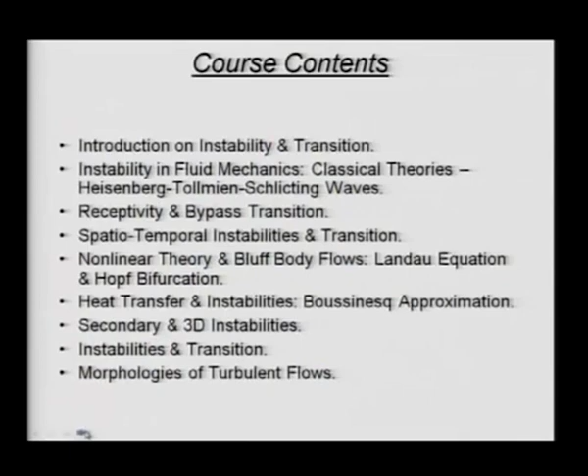So let us get back there and continue the historical introduction that we have been talking about, that following the experimental observation of Reynolds.

This was in turn triggered by the observation by Stokes that he could not get the pipe flow calculations to match with the experiments, and was followed by Reynolds in his pipe flow experiments.

He showed that small ambient disturbances actually magnify, and that leads the settled laminar flow to go from

laminar state to turbulent state, and the whole idea of that experiment will be revealed to us later.

But let us now basically talk about the other aspects, that the whole stability study was started with the mistaken belief that viscous action, if it is there, only damps the disturbances, and this was essentially the idea of

Kelvin and Rayleigh. This was settled after a lot of jousting, you can say, between various

groups, among various groups from Germany and Europe in the continent, as European continent in UK, and finally settled by

experimental observations at NBS Washington by Dryden's group.

And we concluded that it kind of established the existence of wavy disturbance flow at the onset, which we called as

Heisenberg-Tollmien-Schlichting waves, or HTS waves, which was obtained by linearized stability theory for a parallel flow. That is the catch.

However, when the same theory was applied to pipe flow, channel flow, and Couette flows, it was seen that these are unconditionally stable for all parameter values.

So basically then people started looking at alternate explanations, and they suspected that this could be due to the nonlinearity

of the instability regime, or it could be that we had used an assumption that the streamlines are parallel.

That could be at fault. So basically we have to include the growth of the boundary layer into account - that is what we mean by non-parallelism. And of course, we may have some other unknown mechanisms, and in this context we come to

So what was observed by him, that the flow itself has a property called receptivity, that it is receptive to certain class of disturbances. It is not receptive to all kinds of disturbances.

So receptivity is something that was proposed, as opposed to the general theory of stability, which is posed

as an eigenvalue problem. And as you know, in all eigenvalue problems you do not need to define what the disturbance is. You have a homogeneous differential equation, and also a homogeneous boundary condition.

So you have no way of putting in this information that there is some definitive input.

So basically this is the beginning of a dynamical approach to the study of stability through receptivity analysis. So in the receptivity analysis, what you do is you look at the dynamical system

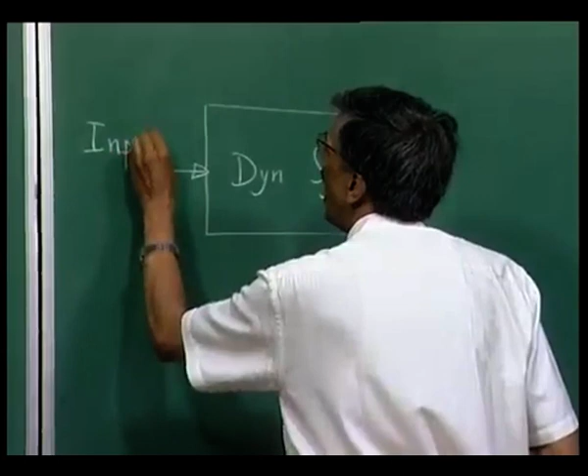acted upon by some input, and that leads to observable outputs. And so receptivity is the property of this dynamical system.

Receptivity is the property of the dynamical system, and this property is what we call the transfer function.

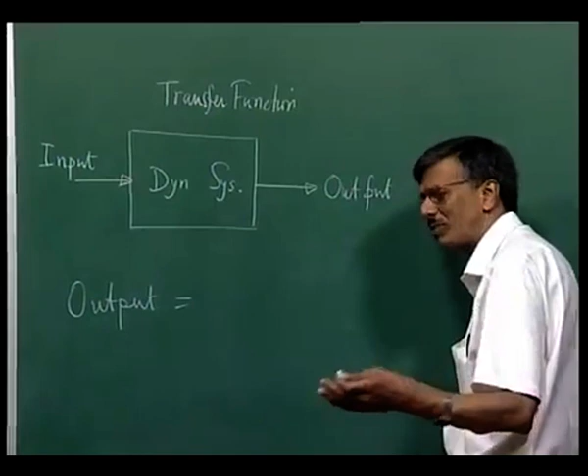So in a sense, what we are talking about is that the output is nothing but a kind of a product, which I will call using the scientific term convolution of the transfer function times the input.

This is important, because as long as we cannot include what is causing the perceptible disturbances, the picture remains incomplete, and this is what Morkovin was suggesting, that we should talk about it.

So if this transfer function is not receptive to that class of disturbances, then even in the presence of that input, it is not going to

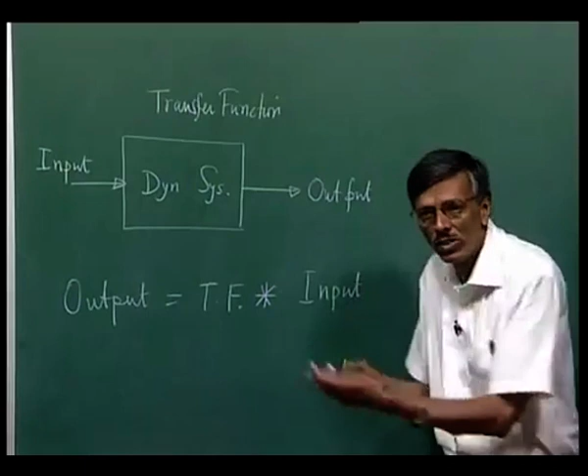do anything. This is rather important, because when Schubauer and Skramstad in their experiment in the tunnel tried to excite those waves by acoustics, they were not successful.

Then they used a kind of vibrating ribbon. So what they did was the following: if you have a flow past a flat plate,

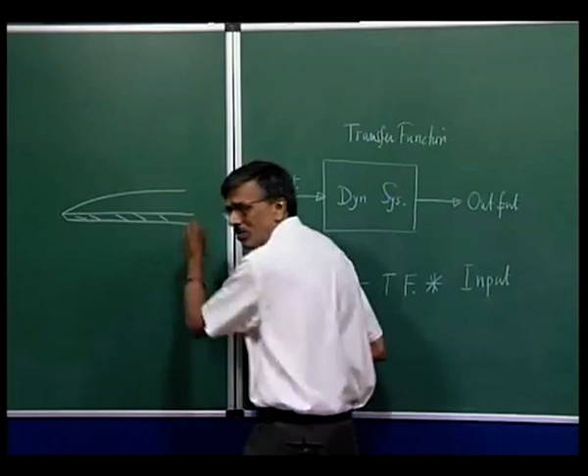then the boundary layer grows like this, and what they did was put in a kind of vibrating ribbon close to the boundary, and then started vibrating it. So this is what you may call the vibrating ribbon.

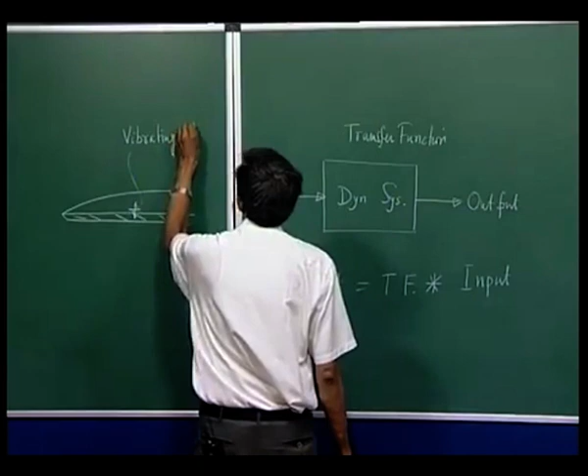This was made of bronze, and it vibrated at a specific frequency, which was actually used in Tollmien and Schlichting's calculation. We talked about in the last class that G.I. Taylor also wanted to do some experiments. What he did was this: you have a plate, and then you put in a kind of vibrating bump.

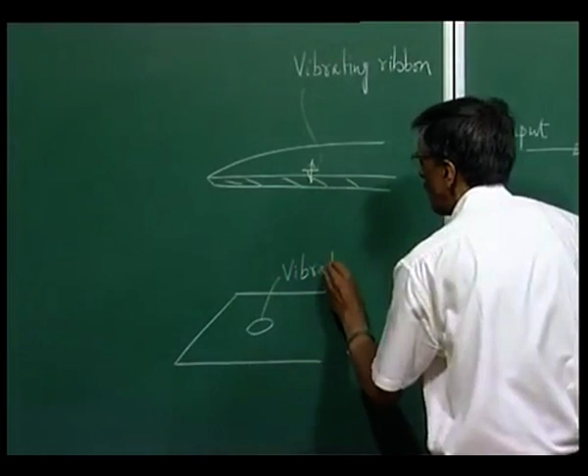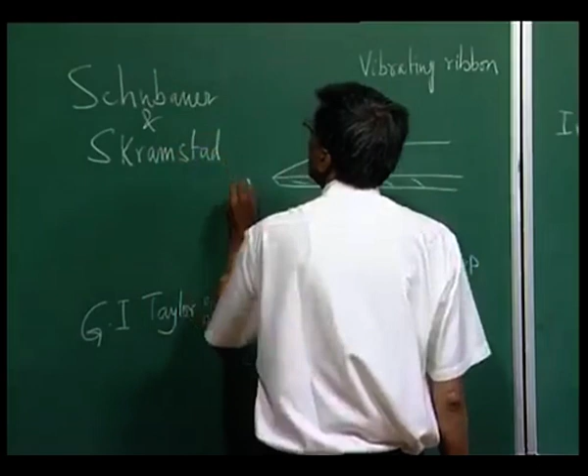This is like a circular patch, flexible, which goes up and down, and this was the experiment conducted by G.I. Taylor in the 30s, early to mid 30s. This other experiment was done by Schubauer and Skramstad. It was published in 1947, but it was done long before. It remained classified during the war years and got published afterwards.

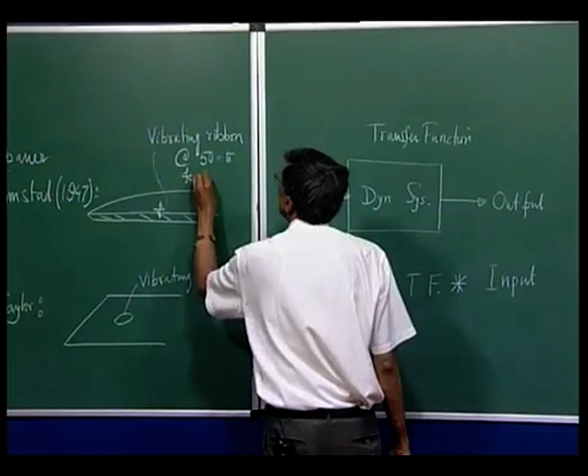So this vibrating ribbon was excited at frequencies of, let us say, 50 to a few hundred hertz. Whereas in this case, this was vibrated at 2 to 5 hertz. So this could not produce a Tollmien-Schlichting wave, but this could.

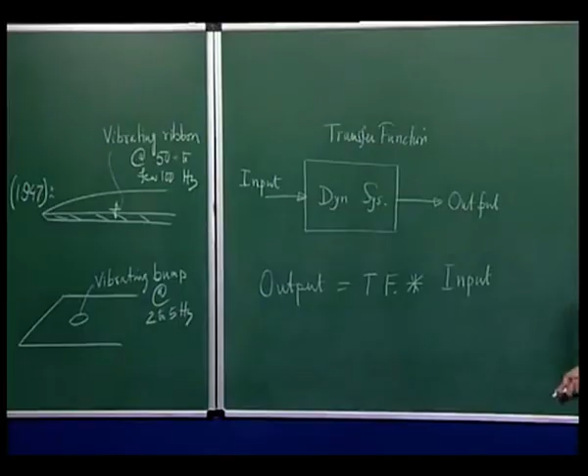The reason is the eigenvalue calculations of Schlichting did show that the flow is not receptive at low frequencies of this kind, but they are indeed receptive to this other frequency. This was something that one needs to do. In experiments, you just do not simply do a qualitative experiment and then make a value judgment.

So we understand. Although I must tell you that G.I. Taylor was an outstanding fluid dynamicist of his time. It is said that he never took any sponsored project. He used to do science for its own sake, using his own money and resources, and he was a professor at Cambridge. He did it for the love of the subject, but even a person of that caliber can sometime take a wrong step, and here is an example.

So this was something that was very good, that Morkovin suggested that we should look at the receptivity approach. We need to understand the transfer function very clearly. Stability theory only looks at the transfer function, whereas receptivity studies look at the full thing, because that also includes the information of the input.

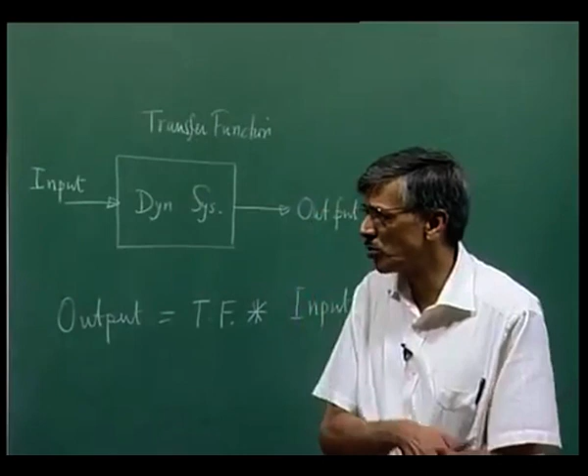We mentioned that there were some flows, like Couette flows, pipe flows, which do not show linear instability. So what happened is some researchers commented that those flows actually undergo transition because they suffer transient energy growth via some modes, which they call non-normal. We will go through these details.

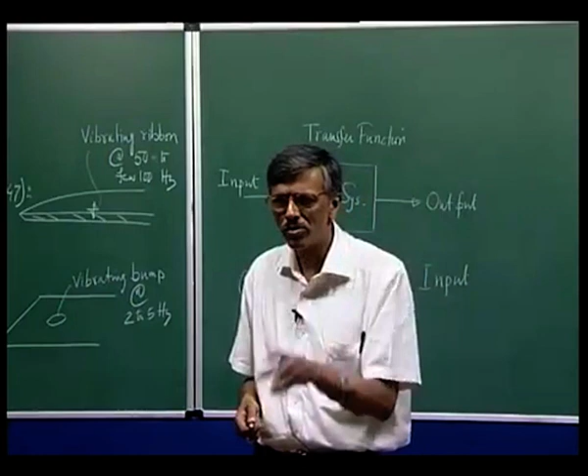The eigenvalue analysis looks at one frequency or one wave number at a time. So those individual frequencies or wave numbers are called normal modes. Here these people are talking about some kind of energy growth, not growing like a wave, but growing in time, and that is transient. It just grows and then it is not there. It directly takes the flow from laminar to turbulent state, not like the gradual growth you associate with the Heisenberg-Tollmien-Schlichting wave transition route.

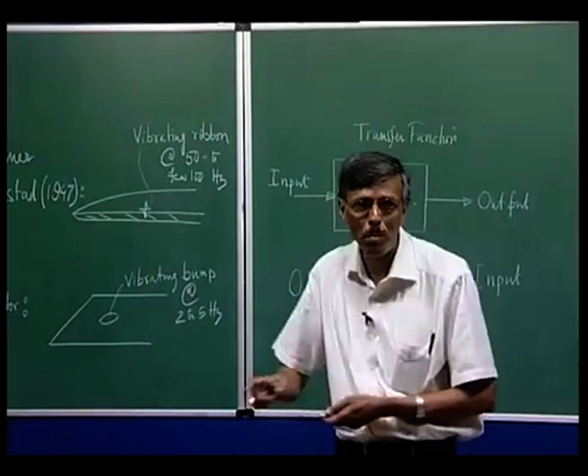Maybe this is an attempt to explain one particular type of bypass transition. We define bypass transition as that transition which bypasses the wave and its growth. This is the view proposed by Trefethen and his colleagues in this paper. There were other attempts by Landahl, where he and his colleagues talked about algebraic growth of disturbances and interaction of different types of instability modes.

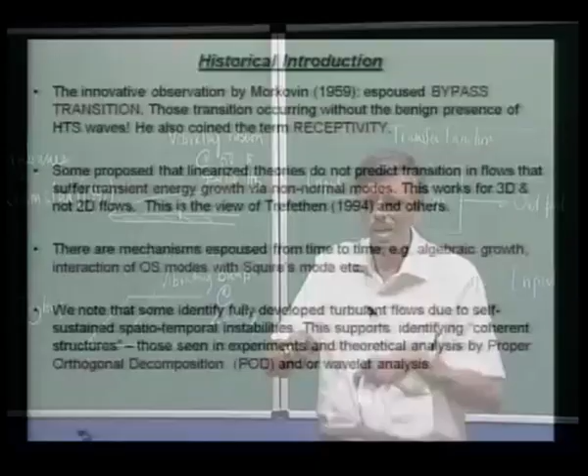Now, we also note that some researchers identify that you get fully developed turbulent flow due to some kind of self-sustained instabilities. This means you do not have to do anything, it will just become unstable, it will grow, become turbulent, then it may decay, but then again another set of disturbances will pick up. So that process is self-sustained, and during this process you create some kind of distinct structure, which has been called coherent structure. Think of eddies, vortices, forming, and those are what are called the coherent structures. They have been seen actually in various experiments.

Some theoretical analysis done by proper orthogonal decomposition or wavelet analysis also shows presence of coherent structures. So this is precisely the status now. We are in a time where we see possibilities of transition taking place through the growth of waves, or bypass transition, which is basically a basket with many routes. We talked about a couple of them: transient energy growth and algebraic growth of disturbances. There could be multiple instability modes interacting, and those also need not necessarily show you waves.

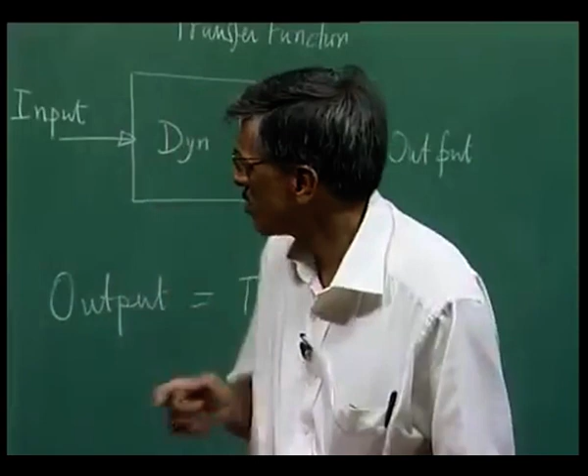But let me add that this experiment we talked about was a very specially designed experiment, and this ribbon was excited at a fixed frequency. So what we are doing is creating a monochromatic wave, and we see some kind of waves that grow downstream.

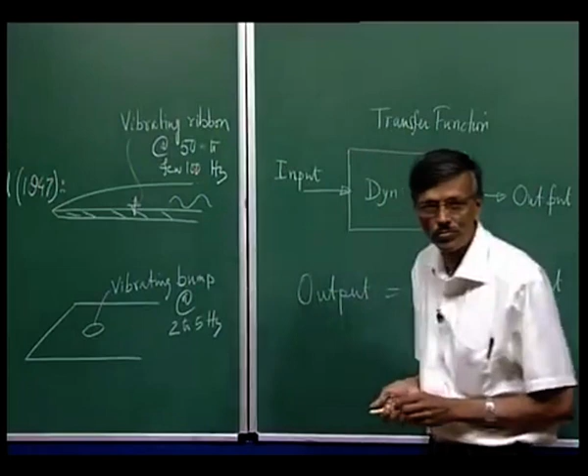Now, what happens in the immediate vicinity of the exciter was not talked about a great deal before the 1990s. People used to think that is not important. Even some books or monographs erroneously show as if there is nothing up to a point, and all of a sudden finite waves start growing. That is a wrong picture. In fluid flow, especially at low speed, you cannot have such discontinuities. It has to be a smoothly growing solution.

In fact, when we first did these receptivity calculations, we identified two distinct components of the solution. One we call the near field, in the immediate neighborhood of the exciter where we are exciting the flow, and the far field. In the far field, you see those TS waves we talked about, but in the near field you may see a totally different structure. We will talk about it in greater detail. So this is the picture we see.

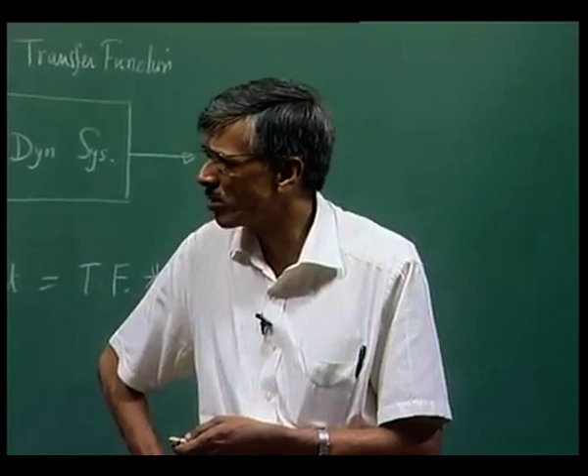Now let us go through the formal description of the subject through this introduction. What we see as instability in fluid dynamical flows is always there, right. That is what we say, that they are ubiquitous, and even today they remain a challenge, because we still do not completely understand transition and turbulence. We understand bits and pieces, and we are going to do that too.

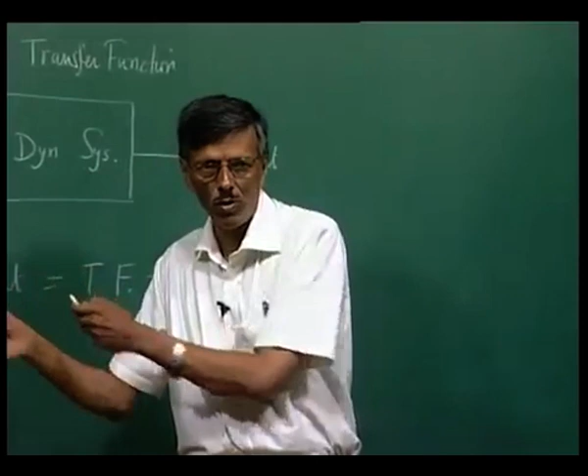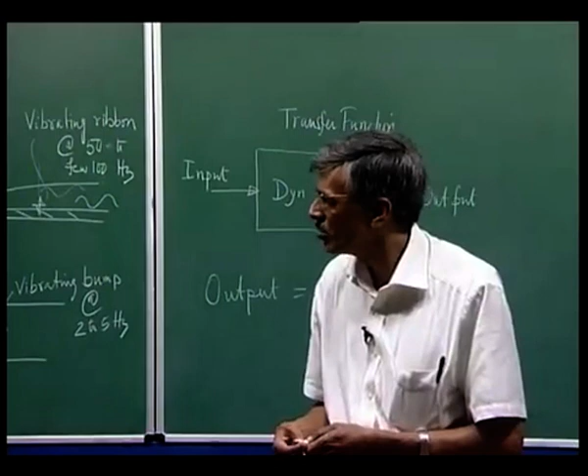Most of the time, people who spend all their effort studying turbulence, at the back of their mind, basically think about some kind of universality of turbulence. What it means is, irrespective of whatever input you have, the eventual output you get is only one turbulence, one kind of turbulence. Although they describe it not in a deterministic manner but in a stochastic fashion, they say that even in a stochastic picture you have a universality, which is debatable, and which some of us do not agree with.

So that is why what we do is go from the laminar flow side: first it becomes unstable in a primary mode, then you could have a secondary instability, then tertiary instability, you could have nonlinear stages, and then you have fully blown turbulence. So that is what we are talking about.

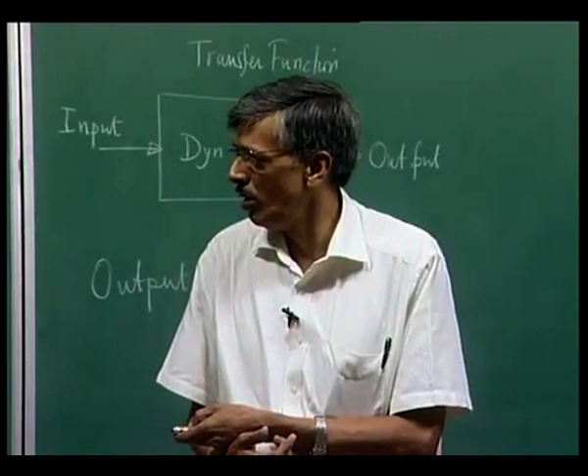So for pure fluid dynamical flow, we are saying it is there everywhere, but if you add some additional physical effects, for example heat transfer or chemical reaction, as you may see in an engine, those also suffer instabilities, and those instabilities are going to be even more complicated. So we will probably spend some time talking about heat transfer. Chemical reaction we are not going to discuss at all.

So, if you are going to work as a theoretician, it is necessary that you communicate to your friends who will do those experiments, and you should tell them how to design the experiments. This is rather important.

So, let us talk about one of the applications that should motivate most of you, where this understanding of the flow transition is very, very crucial.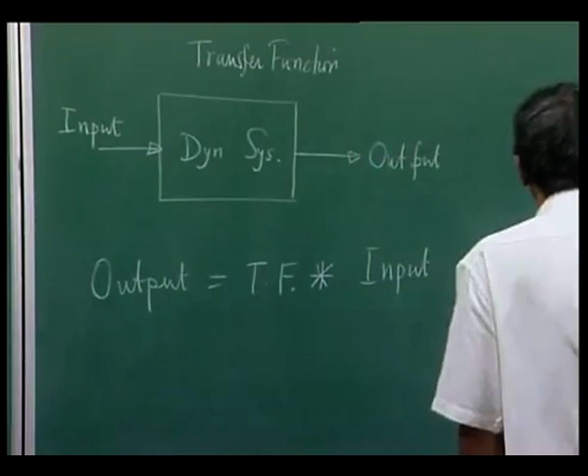For example, we are talking about modern day aircraft, where we basically want to keep the flow laminar as long as possible. Why? Because if I plot the drag, or one component of it, the skin friction, versus Reynolds number, then we know even for flow past a flat plate, the laminar flow, if I do it in a log-log scale, it goes like this. So this is the Cf versus the Reynolds number for laminar flow.

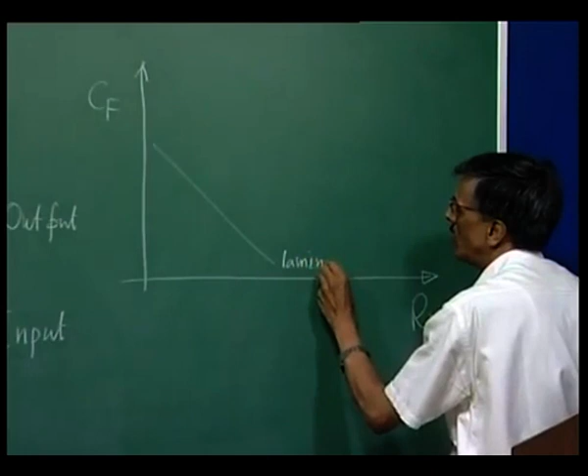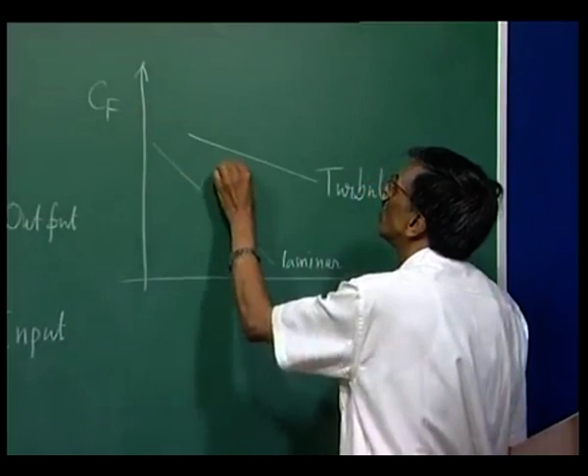Depending on the kind of disturbance that you have, it actually goes on to a turbulent branch. So the way the transition process takes place depends on the background disturbances, and it connects like this, depending on different levels of disturbances.

So that is why the receptivity factor comes in. Where would you continue up to this laminar flow? It depends on how you control the disturbance environment. If you can control it well, then instead of flow becoming turbulent here, you can delay it and it can happen later. And you can see that we are talking about a log scale.

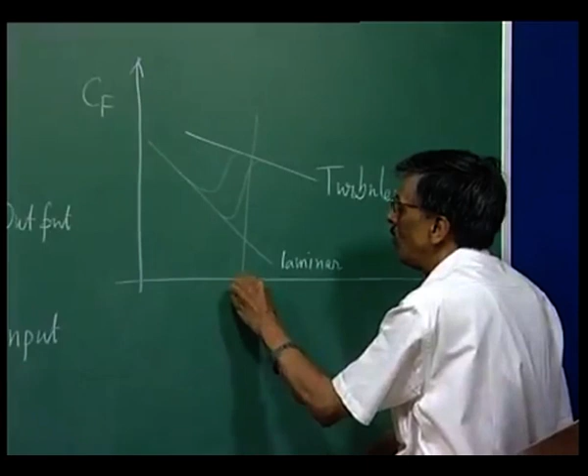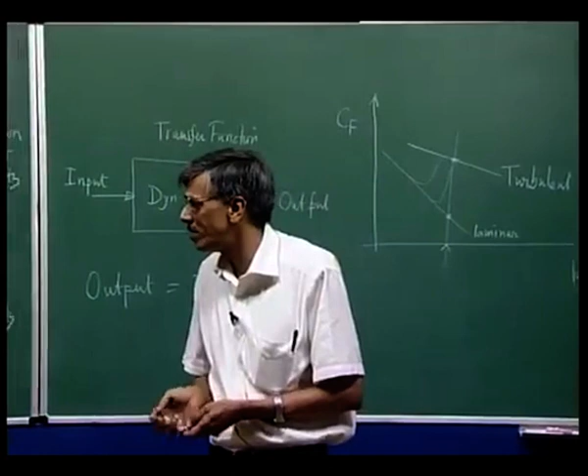So if I look at a position, then I can see for laminar flow the skin friction is here, and for the corresponding turbulent flow, if it is fully developed, it is there. This difference is quite significant. We will give you an example - you find that this is significantly higher. So one of the goals for any good aircraft designer would be to keep the flow laminar as far as possible.

And there is a technology which is called natural laminar flow technology, which tries to design and alter the wing geometry such that you can control the transition process. So those wings are called NLF wings, or natural laminar flow wings.

And you understand also that in designing those wings, we are not depending upon active devices. Why not? Because for an active device, if it does not work, then we will be in deep trouble operationally. Think of it - you have designed an aircraft thinking the flow will be laminar, so you have put in some engine, and then up there in the sky while it is flying, your active device fails and flow becomes turbulent, and the engine does not have sufficient power - then your flight is in jeopardy.

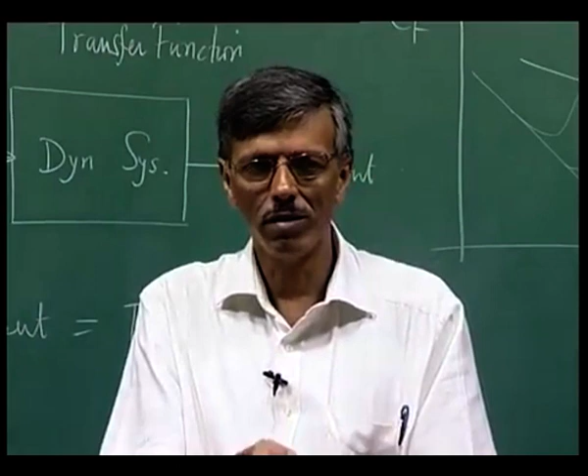So in aerospace engineering, we are always very conservative. We always try to go for passive devices instead of active devices. Although that does not preclude that we do not basically look at active devices - a lot of research goes on using various active devices.

And here I have shown you a picture of an Airbus 340. So this is the isometric view of that aircraft that you can see. The green part in this diagram indicates where you could try to keep the flow laminar. So you are not trying to keep the flow laminar over the full wing - it is only part of it you try to keep.

And if you can do that, one is talking about a 12% gain, 12% reduction in drag, and that is quite significant. And as I told you, apart from the fuselage, most of the aircraft actually experiences drag that is due to skin friction, the viscous action. It is not as much due to the pressure component. We have two components of drag: skin friction drag and pressure drag.

So it is the fuselage actually that gives a significant amount of pressure drag. I will give you an estimate, so you will see that estimate. So you can actually think of reducing the wing drag by 10 to 12%, and that is quite significant.

Empennages are those control surfaces, the horizontal stabilizer and the vertical stabilizer, they are also wing like bodies. So you could basically keep the flow laminar over those also. Whatever works in the wing would also work in the horizontal and vertical stabilizer. In addition, you could also keep part of the flow over this nacelle which houses the engine laminar, and there you can think of getting a 1% reduction in drag.

So it is quite possible to do that, but you notice that this aircraft's wing is swept back, making some angle with the fuselage direction. Swept back wings are not too amenable for keeping the flow laminar. That becomes better if you have the sweep back angle smaller. That is why many aircraft designers would not like to have the sweep back too large. A rule of thumb is try to keep your sweep back angle less than or equal to 20 degrees. Why do we need sweep back?

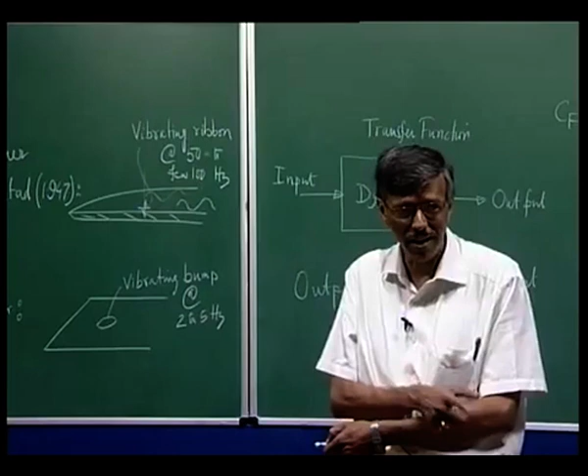Most of these aircraft fly at what speed? It is about Mach 0.8 and thereabout. So if the aircraft is moving at about a Mach number of 0.8, then in some part of the wing you could get a shock. So the good news is if you can keep the flow laminar and design the contour in such a way, that also helps in controlling the shock. So those are called supercritical wings. Supercritical wings are designed for keeping the shock weak.

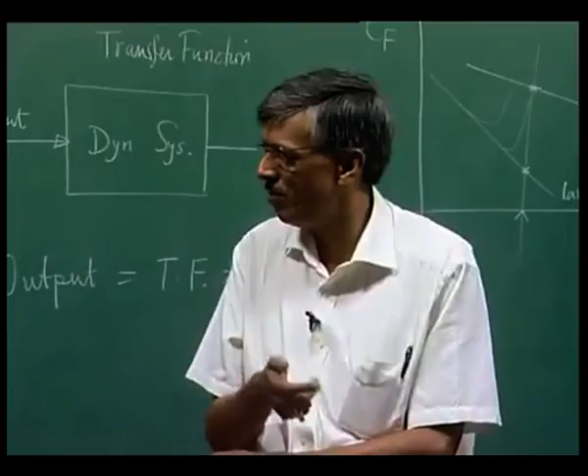It so happens that what works for supercriticality also works for natural laminar flow. So all the modern day aircraft that you see, like A340 or Boeing 757, 767 and higher models, they all have NLF wings which are also supercritical wings. So you try to push the frontier, go as high as possible in terms of Mach number, and to avoid shock forming you have to provide the sweep back. What matters most is the Mach number normal to the leading edge, not parallel to the fuselage. That is why you sweep it back, so that the Mach number normal to the wing becomes lower. That is the whole idea.

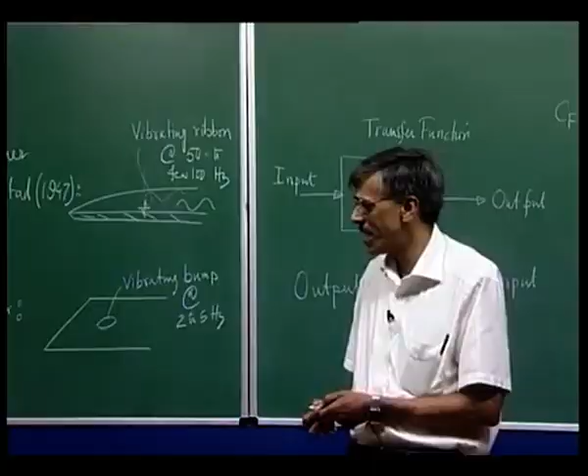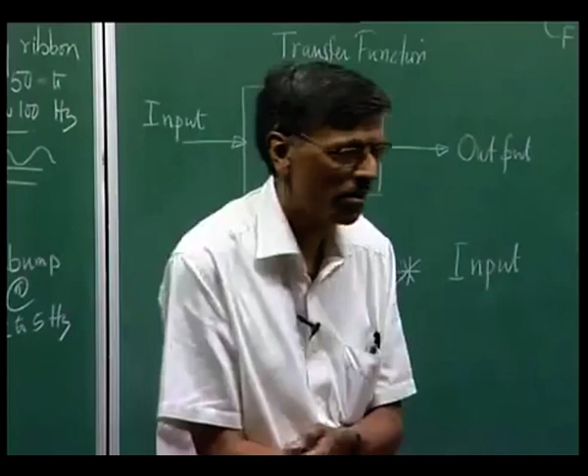Now if you are trying to design a new aircraft, these are the problem areas. Even today we do not predict transition very well. We simply do not, and even if we do, they are not very reliable. And if you are talking about the problem of prediction, experiment is virtually impossible, simply because every wind tunnel brings its own signature. You take the same aircraft model and do experiments in two different tunnels, you will find a very disappointing result, because they will all be different. So this is what we try to keep in mind as we go along.

So we are going to look at how things work, and this is an example of a beautiful design. I am not very sure if it is still out yet, it was supposed to have been inaugurated this year. This is an aircraft designed by Honda, and unlike any other aircraft, the surface finish of this aircraft is superb. This has happened because the automobile sector has better manufacturing ability than what we do in making airframes. If you come close to an aircraft you see those rivets, the gaps, they look very ugly, and they also actually create a big potential for transition.

Whereas these people have designed the wing as an NLF wing. Honda, I will show you some clip today itself. And not only that, they have also positioned this nacelle with respect to the fuselage in such a way, it is a beautiful design, because if you calculate the drag of the nacelle, calculate the drag of the fuselage, add the two up together, and then go to the tunnel and do the experiment with the fuselage and nacelle together, that total drag is lesser than the sum. So this is what is called synergy in design. This is one of the most beautiful aircraft that has been designed.

Compared to that, you can look at the fuselage that contributes to 0.0092. So you can see it is the fuselage which actually contributes more drag than even the wing. Then the stabilizer gives a drag of the order of 0.0027, roughly about half of what you get from the wing, so it is not negligible. And the nacelle and other miscellaneous contributions, that is about 0.001. This all adds up to about 0.0189 or so.

This column tells you the percentage component. So wing drag is roughly about 32%, the fuselage is about 48 to 50%, the empennage contributes about 14-15% of drag, and the nacelle and other quantities define about 5 to 8% of the drag we talked about.

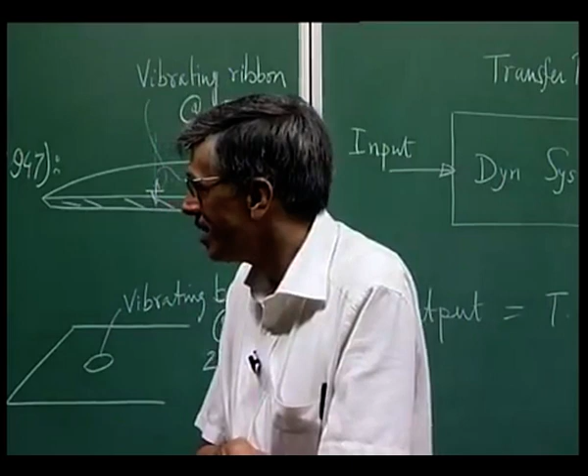Now, if I show you that picture for the Airbus A340, suppose we manage to keep the flow fully laminar on all lifting surfaces, not part, lifting surfaces - that is just the wing and the empennages, nothing else. If we can keep that, then the drag of the wing would come down from 0.006 to 0.002, that is 1/3 the value, as shown here.

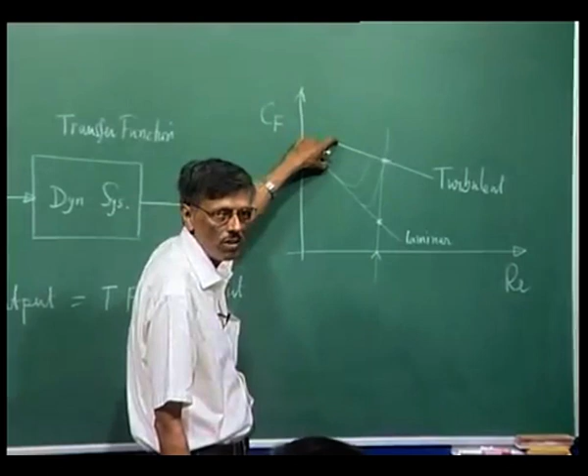Actually this jump for a flat plate is about 5 to 10 times. So you try to keep the flow laminar as far as possible, and further you keep it, you see the dramatic growth. Suppose it becomes turbulent here, then this differential is not very much, but if you can keep it like this, you can actually get a very significant reduction in drag. So that is what you see, the drag becomes 1/3 for the wing.

Now the fuselage of course remains the same at 0.0092, and the empennages also become almost 1/3, with other things kept as is. So the drag has reduced from 0.0189 to 0.0131. And now you see what has happened: the wing contributes about 15% of the drag, but the fuselage contribution has gone up to 70%, and the empennages have also come down, and the nacelle has also come down.

So talk about the flow over a nacelle. Now there also people have done something. What really matters is the pressure gradient in the flow. So if I simply take a cylindrical nacelle, its pressure distribution is given like this - you have a suction peak here. Following the suction peak, you have a severe deceleration of the flow. Adverse pressure gradient is very large in this part.

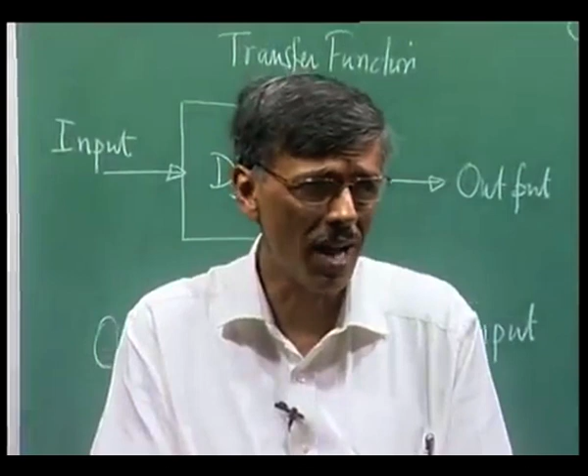That actually triggers transition immediately. So one rule of thumb is avoid adverse pressure gradient as much as possible. If you are aware of the NACA 5-digit series and 6-digit series aerofoils, those were designed knowing this - that you have to keep the flow under favorable pressure gradient as long as possible. One theme in the development of those aerofoil sections in the 1920s and 30s was to keep the maximum thickness point as far aft as possible - they pushed the maximum thickness point to say 35% to 50% and so on. That is the story of 6-digit series aerofoils.

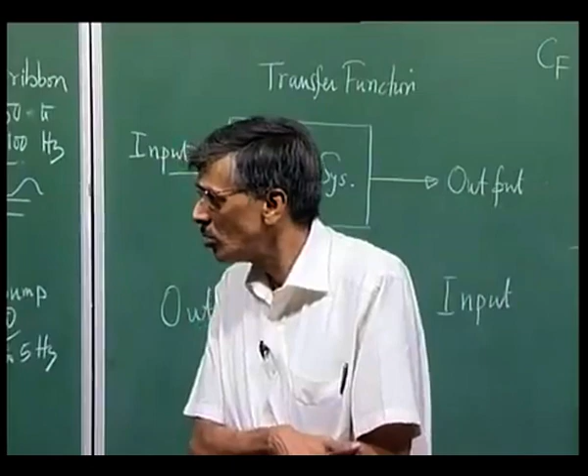So here also you can do the same thing. Now you can see the contouring - instead of having a flat diameter, now it has been increased. And if you are looking at flow less than Mach number 1, such a contour would create a flow acceleration up to the maximum thickness point, giving you a very smooth CP distribution as compared to this peaky CP distribution.

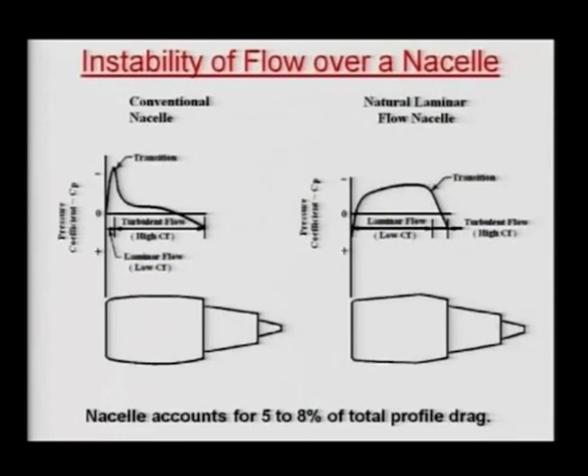So this is one of the ways people have been talking about reduction of drag over the nacelle, and we have already said it accounts for about 5 to 8%. Whatever you get, it is good enough. Somebody said sometime ago that if you can reduce drag by 1%, the operational cost comes down by a few billion dollars. We just saw that for an aircraft like Airbus, people are talking about some amount of drag reduction by promoting laminar flow, but we also saw the Honda Jet, which looks gleaming and has a very fantastic drag polar, which is very good.

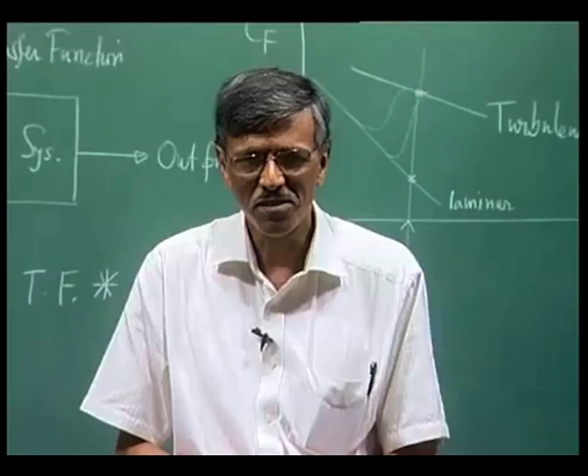I told you about surface finish. Now, surface finish is not something you only see with your naked eyes. Sometimes you worry about roughness, which you can only measure using profilometers. The effect of even small scale roughness can be very profound, and people have known about it. This effect of roughness is a function of Reynolds number.

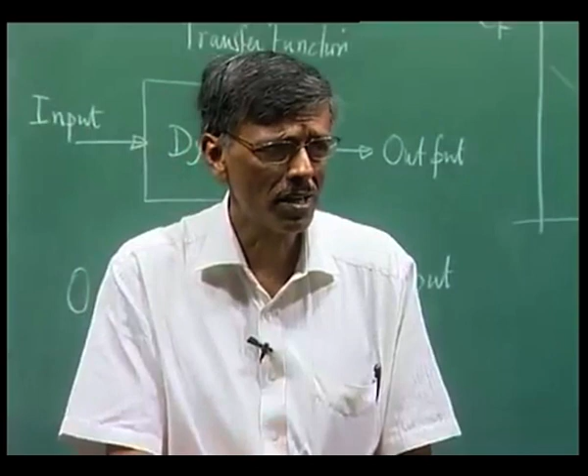You see all those NACA 6-digit series aerofoils which are designed, they somehow work for gliders, but they do not work for powered aircraft. Why? Because unpowered aircraft go at a smaller speed, so Reynolds numbers are lower, of the order of a few hundred thousand, whereas if you look at that business jet we saw, the Honda Jet, the cruise Reynolds number is something like 10.3 million. The aircraft in our flight lab would also have a cruise Reynolds number of the order of a few million, if not 10.

So, at those high Reynolds numbers, the small roughnesses act like an amplifier. They really promote turbulence. The effect of roughness on airfoil sections is quite well known. That is why 6-digit series aerofoils are not used in any commercial aircraft that you would see. They have major effects on lift, drag, and bypass transition near the leading edge.

Now, let me tell you somewhat about the property of these natural laminar flow aerofoils. They have the following property: if I plot the section property, on this side I will plot the non-dimensional lift coefficient, and on this side the non-dimensional drag coefficient. These NLF aerofoils, or the 6-digit series aerofoils designed in the 20s and 30s, have this following type of property.

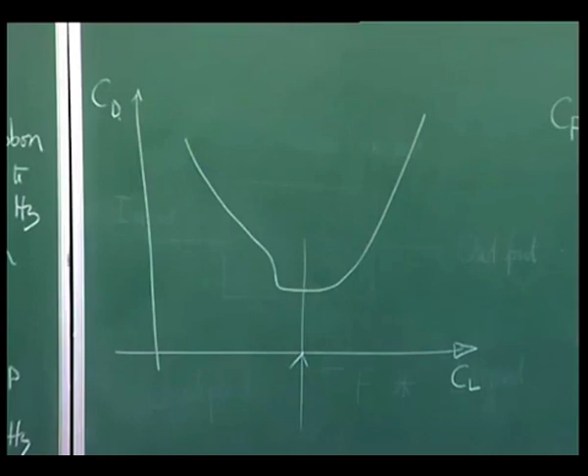So what happens is you design it for, say, this point here. So this is your design point. At the design point your drag is quite nice. This could be your cruise configuration, but suppose when you are landing or taking off, or if there is some other off-design condition, you can see that if you are here, then this drag and this drag are quite different, and roughness actually changes this curve altogether.

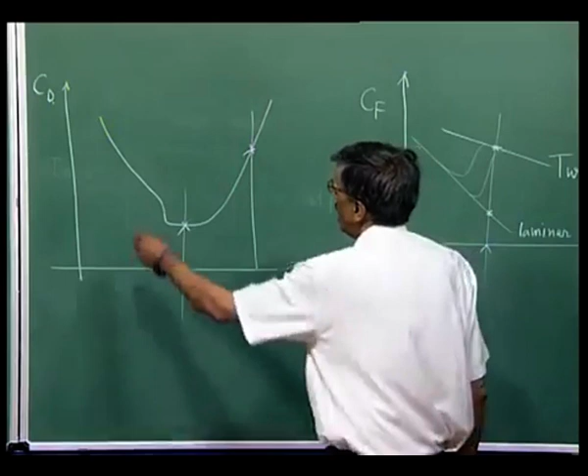If you have roughness, you could see that this could actually go like this. So this is what is called a drag bucket. Most of those 6-digit series aerofoils have a drag bucket; the drag polar looks like a bucket. If you are working in this region, it is all very fine. Outside that region, drag increases very badly.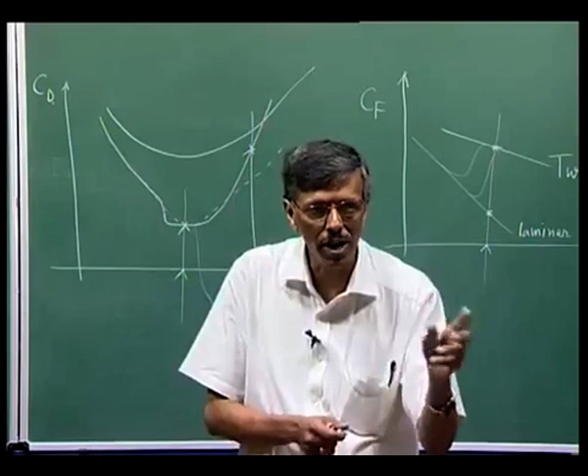That is why it was done. Whereas the modern day NLF aerofoils would be something like this. So it is not a single point design, it is a multi-point design. You try to design it not only for the cruise configuration, but also for, let us say, landing and takeoff and so on. However, we have seen that this rapid increase in drag is contributed by roughness for those 6-digit series aerofoils.

And what it does actually, this roughness element, where it sits, is almost like a bump, and it creates some kind of streamwise vortices, like helical structures in the streamwise direction. These streamwise vortices actually create an instability called cross flow instability, and it is basically inviscid in nature. So you have no way of controlling it. Inviscid mechanisms: these vortices create some kind of inviscid instability, and they are going to trigger transition immediately.

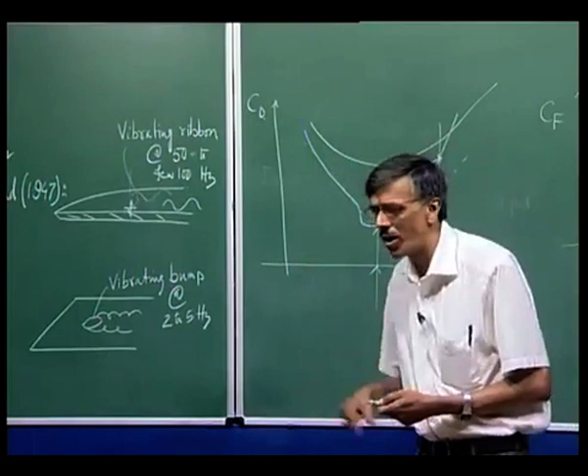So that is why you try to avoid having roughness. This was investigated by a group, Radeztsky and his co-authors, who actually tested a 45-degree swept wing with this particular natural laminar flow section. This is what is called the general aviation wing, GAW wing, with the number code 0415. This is a 15% thick aerofoil, and they compared the location where transition occurred for the following 4 cases: you take a painted surface...

One would probably think painting makes a surface smoother, but despite that, the peak to peak roughness height is of the order of 9 micron. That's not too large, but even from a transition point of view it could be disastrous. You could machine polish the surface, bringing down the peak to peak roughness from 9 micron to 0.5 micron RMS. But what works best is the individual ability to do it by hand—a hand polished surface actually brings down the roughness height to even lower values.

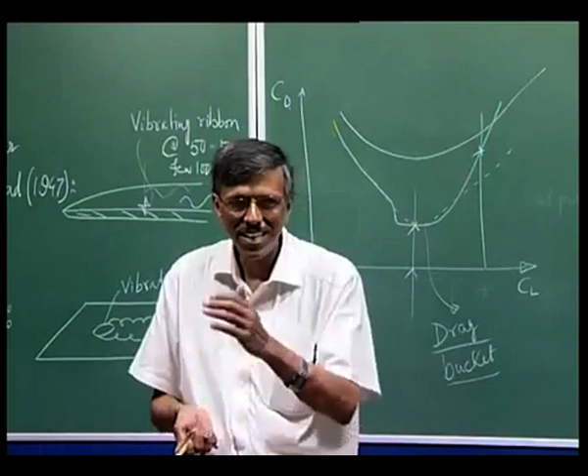Even today, a lot of model making for transition experiments takes care of this. This is the story of average transition location plotted against Reynolds number. This is your painted surface, and here is a first polishing of about 0.5 micron, then your final polish. Fix attention on a particular Reynolds number: for the painted surface, the critical Reynolds number location is somewhere between 30 and 45%.

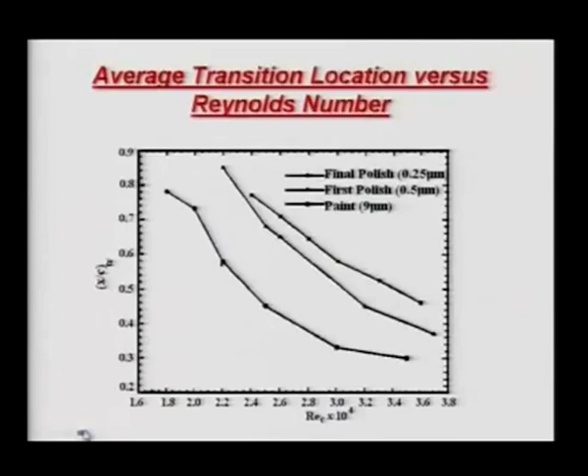If I look at 3 million Reynolds number—this axis is 10 to the power 6—at 3 into 10 to the power 6, transition occurs around 32% for the painted surface. But if you go to the first polished surface, it shifts to about 50%. And if you do a hand polish, you can push it even further, close to 60%. So it is not trivial—you are talking about keeping the flow laminar from 30% all the way up to 60%.

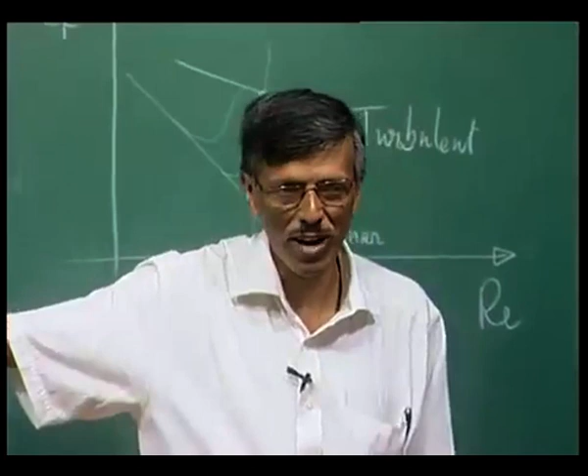So the effect of roughness is profound. And what do we do when we do calculations? We always calculate uniform flow past a smooth surface. So you understand why we do not do so well when it comes to computing also, because we do not have the wherewithal to put this input into our computations. Some of us try to do it, but the rest, especially commercial packages, have no way of really even comprehending this problem.

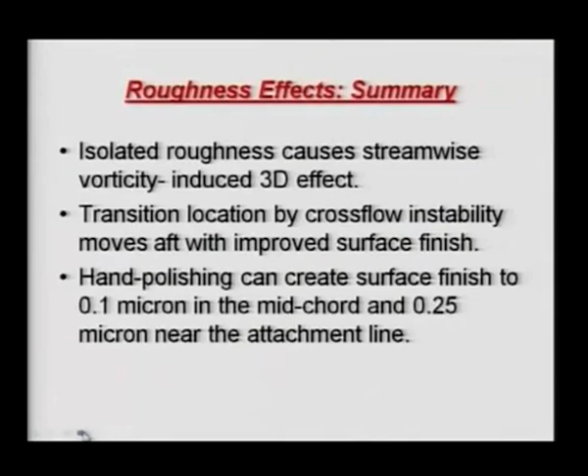So we understand what it is. To summarize the effect of roughness: isolated roughness like what we've shown induces a 3-dimensional effect via streamwise vorticity, and the streamwise vortices create an inviscid instability. You can prevent transition occurring early due to cross flow instability if you remove this isolated roughness by proper surface finish. Hand polishing can create a surface finish up to 0.1 micron near the mid-chord region and 0.25 near the attachment line, which is near the leading edge—there you have a curved surface, so you can't do quite as well.

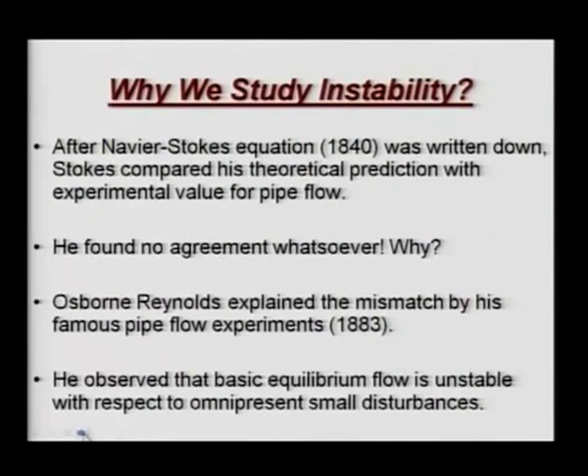Why do we study this? We've talked enough about it, so we know what we're discussing. But here I want to show you what Osborne Reynolds did. He performed his famous pipe flow experiments and noticed that the basic equilibrium flow is unstable with respect to background disturbances. Let us see what he did in his experiment.

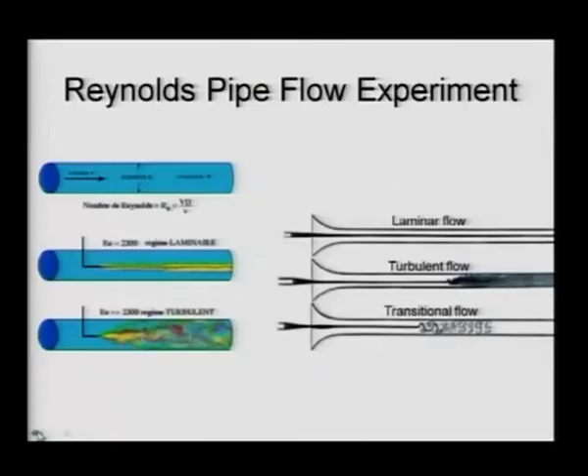Again, it is an incompressible flow. You are reducing the diameter. So you are basically imposing a favorable pressure gradient, or you are accelerating the flow. In the presence of a favorable pressure gradient, the background disturbance strength comes down. That is how you do it.

And unfortunately, the lab where Professor Reynolds used to work in Manchester was next to a main road. Those days there were no automobiles, but there used to be horse drawn coaches etc., and they used to give rise to acoustic excitation. That is why he used to come back and do those experiments in the middle of the night, and he could keep the transitional Reynolds number as high as 12,830. And this we are talking about in the 1880s.

Subsequently, Ekman did experiments, and Ekman and Schiller reported that they could delay the transition all the way up to Reynolds number 100,000. So this is something we must keep in mind, that disturbance plays a major role, and that is what we wrote, that if you starve the input of disturbances, the corresponding things will be milder.

This is what we see. So in summary of this experiment, we say that equilibrium flow, that is the laminar flow, if we have obtained it analytically, we only worry about these two things. A mathematician always likes to think in terms of existence and uniqueness of the solution, but that story is not complete, because even if you have shown that a solution exists and is unique, you may not observe it in nature.

That is related to what Landau and Lifshitz have said very clearly, that the natural flow that you would see must not only follow the equations of fluid dynamics, but also be robust enough to withstand all those background disturbances. They have to be stable, then only you will notice that flow.

So this is at the heart of instability studies, and we said that Reynolds could keep his transition Reynolds number up to 12,830. That prompted him to say that the condition he could achieve is one of instability for disturbances of a certain magnitude. And if the magnitude is lower, then flow is stable. If the magnitude is larger, it is unstable.

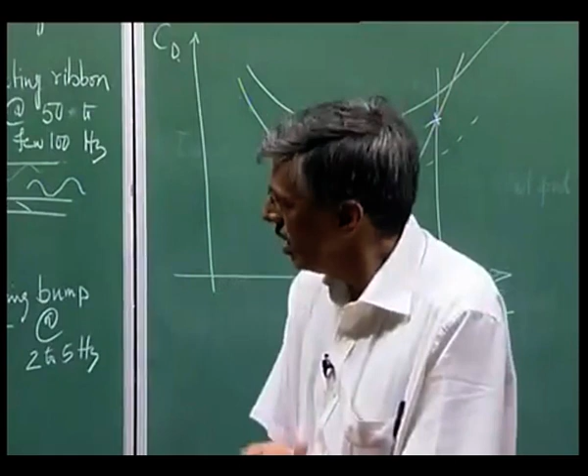So what is this? This is the nonlinear aspect, where the phenomenon depends on amplitude, that is nonlinear instability. This is something he could prophetically say, because subsequently, after him, when linear theory came and people investigated, it was found to be stable. So why does pipe flow become unstable? Reynolds himself gave this suggestion. Okay, I think we will stop here.